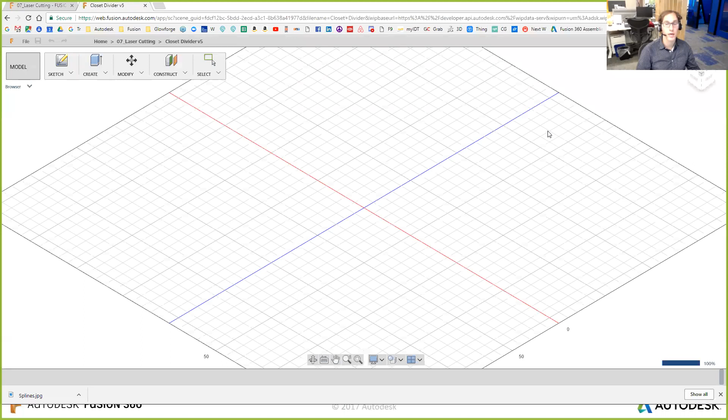Now, we are going to focus today on the desktop client, so I'm going to bring that up. And we are focusing today on sketching. Now, to some people, sketching is not the most interesting of topics. To me, I think it's the fundamental skill that you're going to need if you want to design anything in 3D. Now, I don't care if you're going to be designing in 3D for stacked laser cut products, or you're going to design in 3D for non-laser cut products. Either way, you are definitely going to want to focus your skills in sketching if you want to be successful.

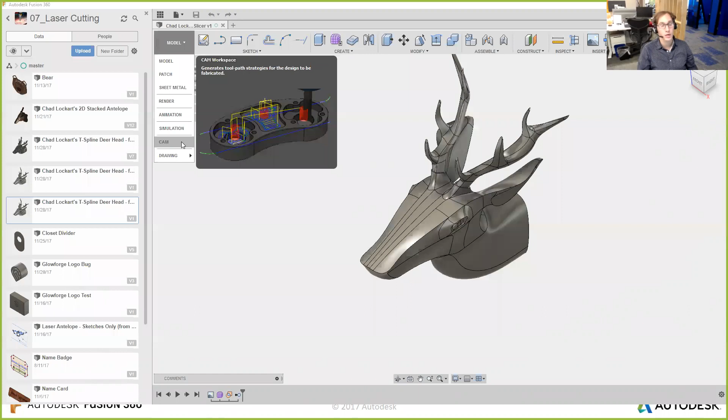The reason is because you can put your kerf offset into the CAM environment, create your design in the final shape you want, and have the kerf automatically adjusted for you. Again, we'll take a look at that in another webinar—today's going to be about sketching. We also have the ability to make drawings, which are 2D drawings for manufacturing.

Now, I did mention that we have the animation environment, and so this is the kind of thing you could do in the animation environment.

Let's say you wanted to start with a front view of your product, and then at 3 seconds in, you want to have an angle like so. And then at 7 seconds, you want a view that looks like this. And then at 13 seconds, you want a really far out zoom like that.

Now I'm going to hit the play button on my computer. I'm not going to touch my mouse whatsoever this whole time. This is just a quick example of the type of animation that you can create here in Fusion in the animation environment.

All right, so I promise you that we're going to talk about sketching today, and I really do want to focus on that. The first thing you should know is that there are multiple ways to get into starting a sketch. The first way is saying, I want to create a sketch, and here's the icon for Create Sketch. I can click on the icon, and the next thing it's going to want to know is where do you want to create the sketch.

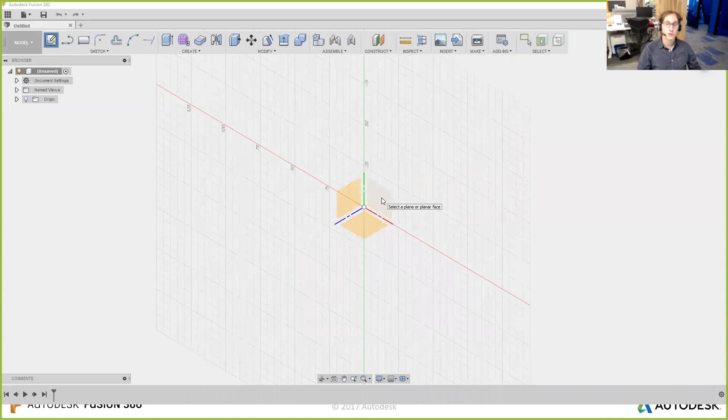Now, you do have to create a sketch on a flat surface. That can be a face of an existing part, or it could be a plane. In this case, I see 3 planes: a right plane, a front plane, and a top plane. I could choose any of these, whatever you prefer is perfectly fine. So let's say I chose the front plane. Now it's going to give me a front view of that particular plane, and I can start my sketch. As an example, I can draw a rectangle or whatever it is I'm going to draw.

I'm going to exit out of this, and we're going to show you another couple of ways you can get into the sketch environment. The next one is I can actually pick the plane first. In this case, I have a folder here that shows me the origin planes. Let me get rid of that rectangle. If I turn on this light bulb under the origin folder, I'm going to be able to see all 3 of those planes that I described, even before I hit that I wanted to create a sketch. I can see the right plane, the top plane, and the front plane.

Hold on a second, I'm seeing from Larry that he's getting input from another mic, which is interfering with the presentation. I apologize, Larry. This is a working Autodesk office, we have over 140 employees, I believe, at this location, and so we do have some noise in the background. Perhaps on the next webinar, I'll, in advance, make sure that I pick a private room for us.

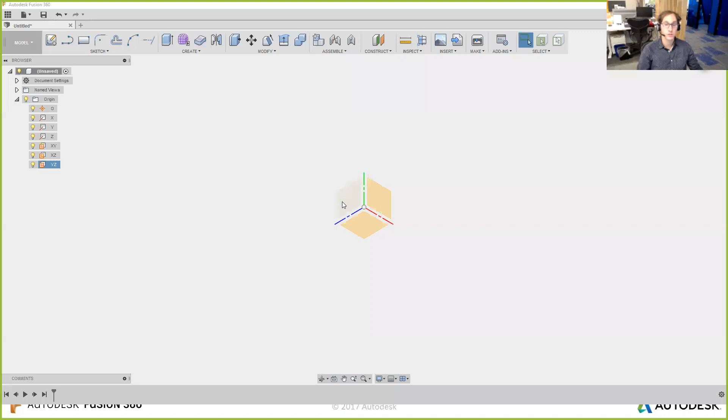So I'm going to just make sure to talk more loudly so that you can hear my voice over everything else. I was saying that you can create your sketch by choosing one of these planes first, right-clicking on that plane and saying Create Sketch. And in that case, again, it's going to reorient me, so I'm looking straight on to that particular view, and I can start my sketch itself.

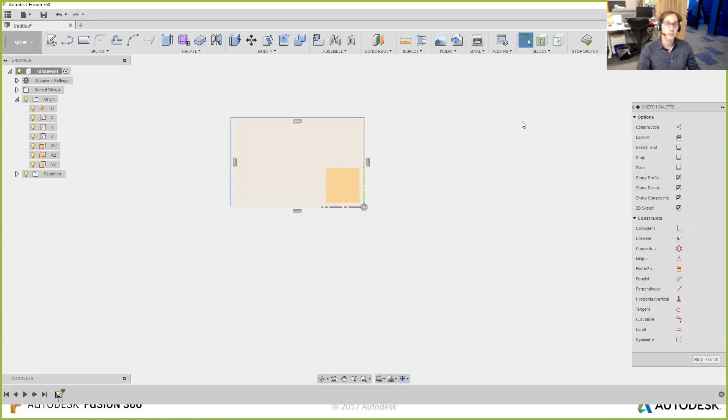Again, just as an example, I can go and choose my rectangle. Now, whenever you want to exit out of the sketch, I was just hitting the Stop Sketch button on the bottom right of my screen. The alternative is I could also hit Stop Sketch on the top right of my screen. Lastly, if I know what I'm going to be using the sketch for, I could actually just start doing that thing. For example, if I wanted to make a box out of this particular rectangle and I'm going to use an extrude, I can simply go to extrude and then actually choose that shape. I don't have to exit out of the sketch first.

Excellent. So those are the 2 ways that I would go into the sketch mode. Once you're in the sketch mode, I want you to know that all of the tools that you might need are going to be in this drop down here on the left, the sketch drop down. The sketch drop down in combination with the items in the sketch palette, that would be everything that you might need to create a successful sketch.

So I have here all of the shapes that I'd want to start with. Let's say I wanted to start with a line, here it is, I can choose line. If I want to start with a rectangle, I can choose rectangle, and within rectangle I have 3 different options for how I want to draw it. Same thing with circle, I have 5 different options. I can do an arc with 3 options, and a polygon with 3 options as well, and this polygon can have any number of faces you'd like. Let's go over each of these one by one.

First is line. I click once, I move my mouse to anywhere I want, and then I click again. When I'm done, I hit enter on my keyboard, or I can drag to this little checkbox and hit it, either works. Conversely, if I'm drawing this and I get to the second point and I hit escape, that also works.

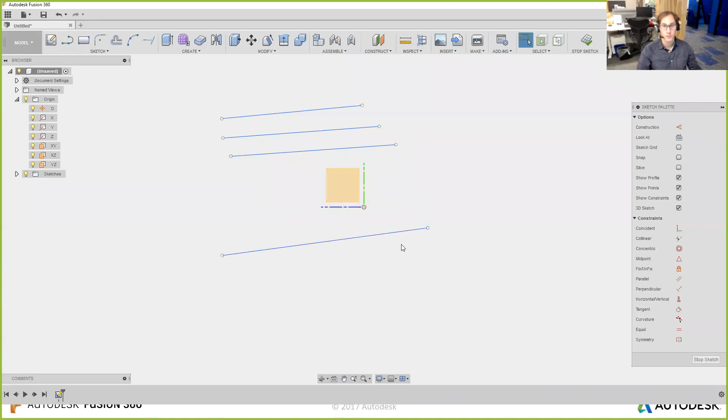The big difference between escape and enter is this: if I draw a line and go to the next place and hit escape, it completely finishes the line and exits out of the line tool. So if you wanted to create another line, you'd again have to go to sketch, line, or hit L on your keyboard, that's the shortcut. Then I could say I want to start at the end point of the first and continue on, but this time, instead of hitting escape, I'm going to hit enter, and same result.

Also, what you could do, though, is if instead of hitting enter, you simply keep choosing new points, that'll actually make basically a polygon or any number of faces that you'd like.

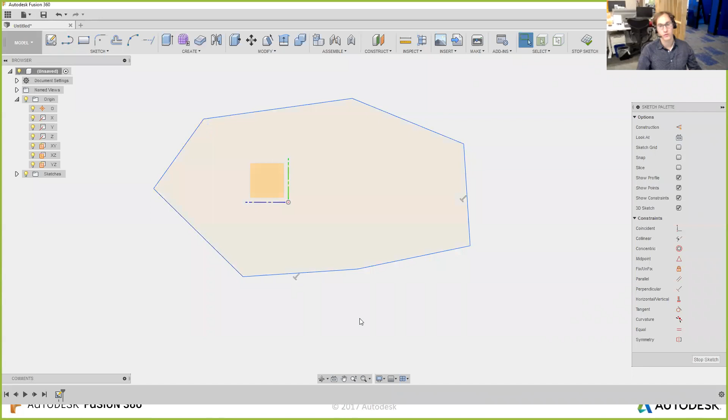Let's do that again. I'm going to delete everything. I'm going to hit the letter L, which is my shortcut for line, and I'm going to click. Every time I click, it's going to make a new segment, and it's going to always be attached to the previous one. You'll see that right here. And when I finally close all of that together, that's when you're going to see it convert into this orange fill in the center of the shape, and that's what you're going to be able to use to make 3D objects.

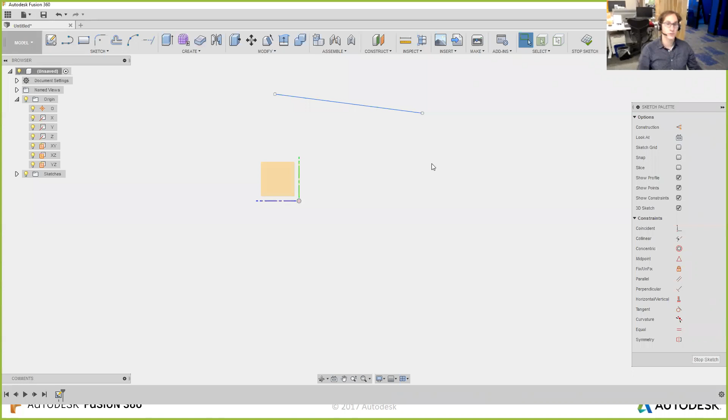So you might be asking yourself, why can you make 3D objects out of this and you couldn't do the same thing when it was just a line by itself? The reason is because the way Fusion interprets objects for being able to turn it into 3D is that it's looking for what we call closed profiles. The closed profile is always going to be a closed loop of some kind, and it could be complicated, it doesn't have to just be a loop like this.

It could also be, for example, a simple rectangle with maybe some more complex geometry to it. And as I'm doing this, you're going to see that it's not going to show me that orange fill until the moment that I connect it to the end, and it is now a completely closed profile.

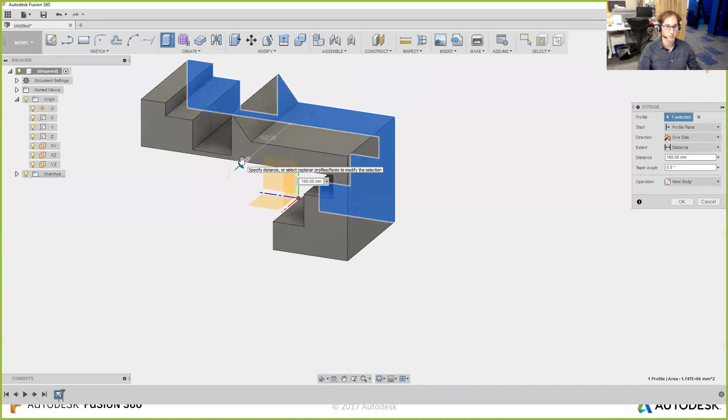This is an object now that I can take and click on. You'll see that the blue fill means that I clicked on it, and the black outline shows the same, and I can turn it into a 3D object of my choosing, like so. I'm going to cancel out of that.

So going back to our line command, the letter L on your keyboard is your shortcut for line. You can click on any point you want, and I want you to see that depending on where you're clicking, you're going to be able to impose what we call constraints to the line automatically.

For example, if I drag the line and it looks like it's approximately horizontal, you can see that there, just in the middle of the line, in the center, there's that blue icon. It looks like 2 horizontal lines and 3 angular ones, that's the symbol we have that represents horizontal. So when I click for the second time here and then hit enter or escape to close out of that line, you're now seeing this icon again, showing you that this line is always going to be horizontal.

If I click on an end of this line and drag it, it'll move, but it's always staying horizontal. If I drag the line itself, again, it'll move, but it's always staying horizontal. In fact, the only way that I'm going to be able to change the angle of this line is to click on this icon, which is the horizontal constraint, and hit delete on my keyboard.

And now that that icon is gone, now I can come in here and actually change the angle of that line. And that's going to be super handy, and we'll go over some more information about that in just a little bit. So I'm going to click on this line and delete it. The next tool here is rectangle. And we have 3 different rectangles. The first one is called a 2-point rectangle.

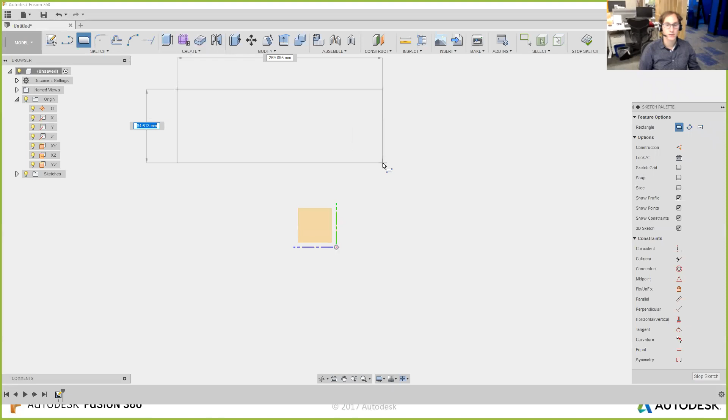And if I click once, and then I move my mouse and click again, it basically drew a rectangle from that corner to the other corner. And it'll do that any time that I'd like. And you can see that it actually shows me dimensions as I'm dragging so that I can have a feel for what the size is going to be of this rectangle.

And if I want, I can even type in a value and then hit enter, and it'll be that value. Not only will it be that value, it would actually show you the dimension. Whereas in the first 2 instances, it didn't show you the dimension at all. You'd have to go and put those manually, like so. All right, let's delete all that and do that again.

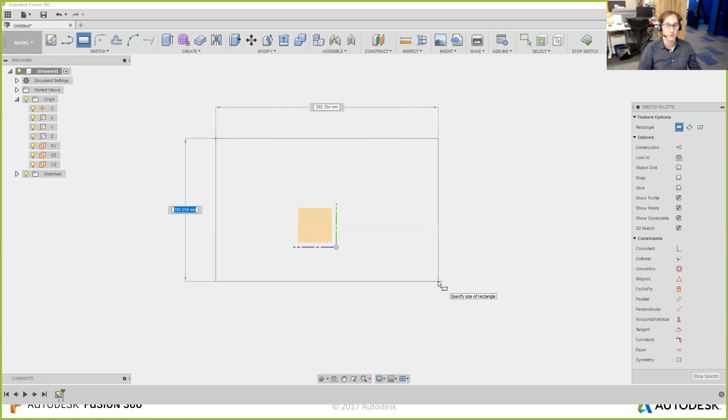All right, we're going to go back and go under rectangle, 2-point rectangle. The keyboard shortcut, right over here, the letter R, is telling me that all I have to do is click the letter R and I get to this tool. I click once. I'm not clicking and holding. I'm just clicking once, and then I move my mouse, click again, and it creates my rectangle.

Now, I do see here that I have a bunch of constraints that were automatically applied. So that horizontal constraint was applied on the top and bottom, and I'm also seeing it on the vertical lines. And you might be wondering, how can you have a horizontal constraint on vertical lines? The reason is because our horizontal constraint is really a horizontal/vertical constraint. It works for either. Perfectly vertical, perfectly horizontal, either or is fine.

And if you ever want to apply that constraint, and I'm going to delete them right now, and when I delete them, you'll see that I can come in here and now manipulate my rectangle, right? Because now it's not requiring any of the sides to be horizontal or vertical at all times. But if I want to apply a constraint, like the horizontal one, I can click on the line, and then on the right-hand side, you can see here it says constraints.

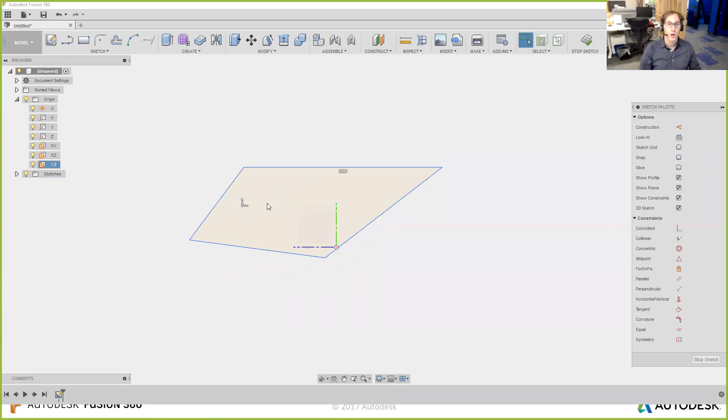And anything below it is going to be a constraint that you can apply to the geometry that's on the screen. So in this case, this one right over here is horizontal/vertical, and it's going to snap to whatever is the closest to the current geometry. So I click it and it goes horizontal. I can click on this line and choose the same thing and it becomes vertical. Same thing over here and it becomes, well, that kind of went into a weird place.

I'm going to undo that, and it's because right now that line happens to be near 45 degrees, and so it wasn't sure what to do with it. But if I drag the line so it's more vertical than horizontal, I can click on that line and choose horizontal/vertical, and now it's vertical. Again, same thing over here, horizontal/vertical, and now I'm back to where I started.

Excellent. I'm going to go ahead and delete this, and we're going to create a different kind of rectangle. This time, the center rectangle. We're going to skip the 3-point for a second. The center rectangle is the same as the 2-point, except when you click the first time, that first click is going to be the center of the rectangle that you draw.

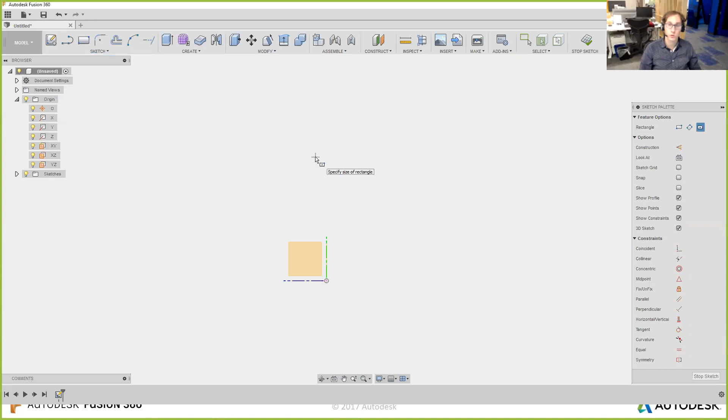So I clicked once, and now I'm dragging out, and it doesn't matter if I drag really wide and not so tall, or really vertical and not so wide. Either way, this is going to create a rectangle that starts in the position that I clicked on in the first place and ends in the second click.

And I could still take this thing and highlight it and move this anywhere I'd like. I can move it around and manipulate it and do all of those kind of things that I'd like. But the only difference is that in certain cases where you know that you wanted to draw a rectangle where the first click is the center, please use the center rectangle tool.

All right, we have a third rectangle. The third rectangle is called the 3-point rectangle. This is a really good rectangle to use when the rectangle you're trying to draw is not perfectly vertical. Let's say you want to draw a rectangle that's on an angle. The 3-point rectangle is for you.

So I click once, I move to another position, I click again. That basically defines what the angle is of the top or the bottom of the rectangle. And then I can drag either way, whatever I prefer, and it's going to set the other dimension. And if I just hit enter, it creates the rectangle. Oh, sorry, I have to click again. Click again, and it creates the rectangle without any problem.

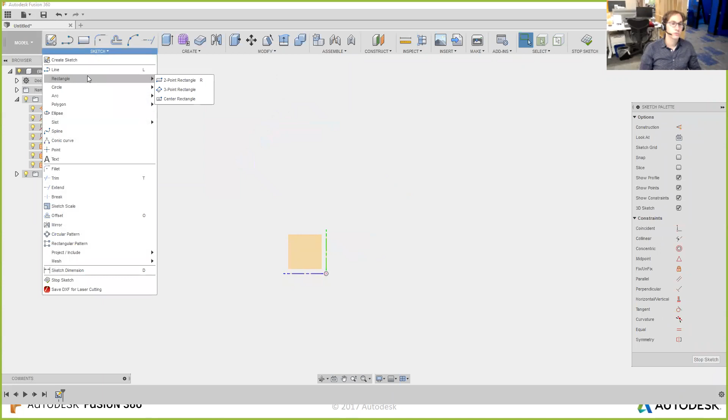Now, I'm going to do that one more time for you guys so you see it again. Try it again. Sketch, rectangle, 3-point. So again, the first time I click, it's going to create one of the corners of the rectangle. The second time I click is going to create another corner. And then the third is going to create the, let's say, height of the rectangle itself.

Now, you could also do this if you really wanted to for horizontal rectangles. You don't have to do this only for angles. So for that situation, a 3-point is I'm going to choose like this. And as I drag to the right, notice that because I'm approximately horizontal, that blue icon for horizontal showed up just below the horizontal line. I click again, and then now I'm creating the height of the rectangle.

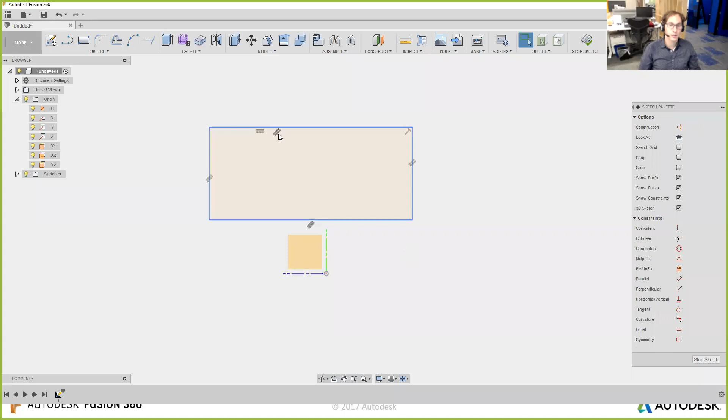So 3 ways to draw a rectangle. There is no right, there is no wrong. There are just 3 rectangles. Now I am seeing a couple of additional constraints that I didn't see before, and so this would be a great time for me to introduce what they are. I'm seeing this symbol, and I see it on the top here, down below, on the left, and on the right. And what that symbol indicates is what's called parallel.

And so right now, there's a constraint saying that no matter what I do with the top line, the bottom line is going to be parallel to it as well. And the same thing is true with the left vertical line and the right vertical line. They are always going to be parallel to each other. So for example, if I were to get rid of the horizontal constraint at the top,

and hold on a second, everyone, I'm going to make sure it's a little quieter here.

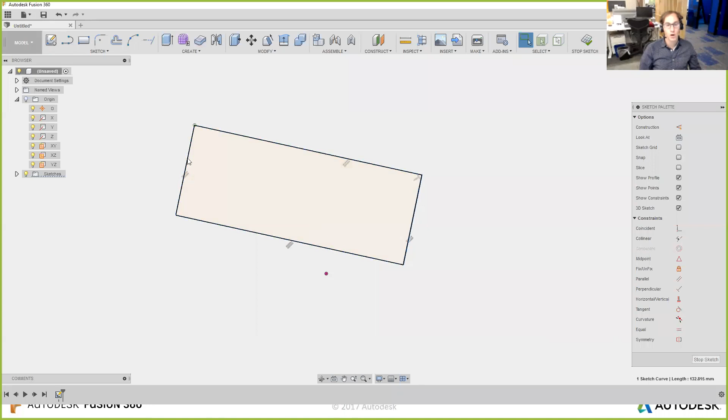Okay, thank you guys. So now that I got rid of the horizontal constraint, I can come in here and, let's see, there we go. I'm going to take this thing and actually start to rotate it. And the key here is that because I have a parallel constraint here and here, these 2 lines are always going to be parallel to each other. I move one and the other is going to move as well, right? Same thing is true with the top and the bottom.

If I ever want to get rid of that, all I have to do is click on the icon and delete it. And notice, by the way, and I'm going to undo that again, notice that when I deleted this one, it deleted that one as well. It's because that constraint applied to both geometries. So you can see the symbol on both sides.

Excellent. So this time I'm going to delete this parallel constraint. And now I can actually come in here and rotate this thing. And you'll see that now this line and this line are no longer parallel to each other. Right? If I ever want them to be parallel again, it's as simple as applying the parallel constraint again.

So I come over here to parallel, click on it, and then I could choose two lines, any two lines that I'd like, and it's automatically going to apply the parallel constraint and show me the icon for each of those as well. Now that that's been applied, any change that I make to one is going to change the angle of the other as well. Okay. Excellent.

Now we do have a third constraint that I see here, and I'm going to zoom in. Actually, zooming in isn't going to make the icon any bigger. The icon itself looks like the letter T, and that icon stands for a 90-degree angle, right? So what that means is 90-degree angle or perpendicular, whichever terminology you prefer to use is perfectly fine. And so right now, this line and this line are 90 degrees to each other. That's kind of why we have that T-shaped icon.

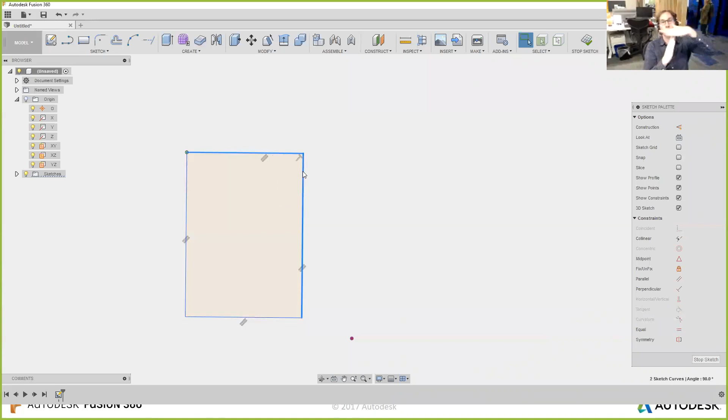And they're going to remain 90 degrees to each other no matter what. So when I drag this corner and this line changes angle, this one's also going to change angle, and it's going to do so that no matter what I do, they're going to remain 90 degrees to each other. If I want to get rid of that one, all I have to do is click on that constraint, hit the delete key on my keyboard, and now I can come in here and I'm going to fix this just so that we have a good example here.

Now I can come in here and bend my rectangle relative to that line. Technically speaking, I believe this is called a rhombus now. And that's what you're seeing on the screen. But if I ever want to put the perpendicular constraint on again, you come over here and I'm going to pick this line and this one. And I'm going to come over and choose perpendicular, and it's automatically going to become perpendicular and show me the icon.

Cool. So we've so far gone over lines and rectangles in detail, as well as horizontal/vertical for a constraint, parallel for a constraint, and perpendicular. But we have a whole lot more to cover. Let's go under Sketch, and this time we're going to go under Circle. So the first one is called Center Diameter Circle.

And what that's going to let me do is choose a first point for the center of my circle, and then when I move my mouse out and click again, that's going to create a circle of a certain size based on how far I moved my mouse. I'm going to do that again even: click once, move my mouse, and it shows me a dimension, and I can even type in a dimension and hit enter. And it's going to create that. Not only is it created to the right size, it's also going to add the dimension. Perfect. I'm going to delete that, and we'll do it a different way.

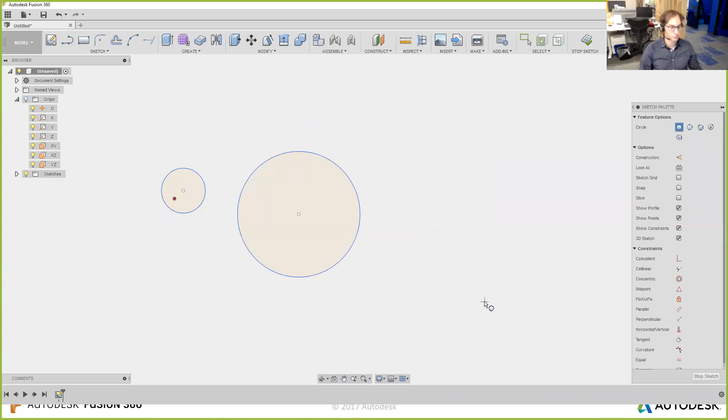Now, you have a bunch of different options. So 3-point circle, for example, lets you pick 3 points. And I did that too fast. Let me do that one more time. Circle, 3-point. I click once, click again, and now I can move my mouse, and as long as those first 2 points and where my mouse is right now are all in the same circle, that would be the resulting circle.

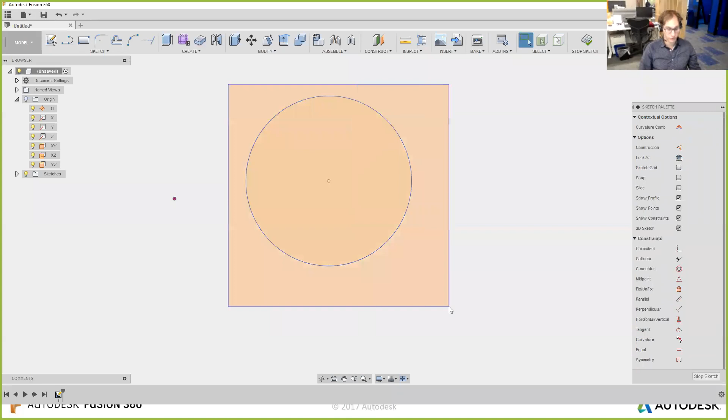Now, the final results are always the same. It's just a circle. It's just a question of what's easiest for you to draw based on what you're actually trying to accomplish. Okay? And we do have other different circles available, but I'm going to leave it like that for now. We also have the ability to draw arcs. And arcs, by the way, are really just portions of circles. And to prove that out, there I have an arc.

Now I'm going to draw a center point circle, and I'm going to drag it so it lines up. And now I have an arc that I can sort of highlight there. And then I have a circle that's on top of it, and you'll see that they're one and the same. In fact, if I delete the circle and leave the arc, I can actually take this point of the arc and drag it all the way around, and when I get it to connect with the other end, it's going to now be a circle, right? An arc is really just a portion of a circle.

Now, I'll admit, I probably use arcs more than circles. I use arcs a lot. We'll go over that in just a bit. I just think that arcs are really handy. The other thing I do is I draw circles sometimes, and then I trim them until they become arcs. Either would work fine.

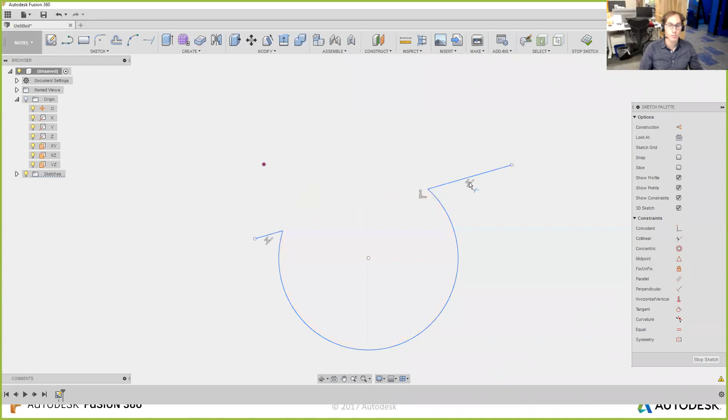In fact, if I draw a line and I cross that circle, I can actually come in here and trim both of these, and so now I'm left with, you guessed it, an arc. Perfect. I'm going to delete that, and we're going to continue on.

Even if you are drawing an arc, by the way, there are 3 ways to draw an arc. The first is the 3-point arc. You pick 1 point, move to another point, pick again, and then when you move your mouse, now it's actually dragging out to create that arc. This is very similar to drawing the 3-point circle.

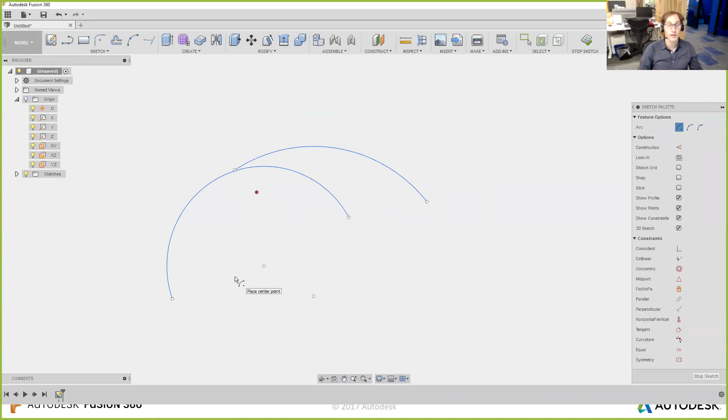Excellent. You can also say, I want to draw a center point arc, where you're picking a point, and then you're picking another point, and the first point is going to represent the center of the arc itself. The second is one of the endpoints, and then you drag around to create the third. Now, I don't want to go over that in too much detail, but I want you to practice trying each of the different ways you can make each of the shapes. Again, the result is the same, it's just a question of how you get there.

And by the way, if you're in any of those tools that have multiple options, like circle, for example, on the right-hand side, even though I chose maybe center point circle, I can switch to one of the other kinds of circles right over here. I don't have to exit out of it and go back to the sketch tool, find circle, and pick another. I can pick any of the circle tools and then choose another from right over here on the right-hand side.

Excellent. We also have the ability to make polygons. So here I'm going to go and create a polygon. And when I drag this out, I have the ability to come over here and choose a number. So maybe I want 10 sides to my polygon. Maybe I want 100 sides to my polygon; the higher the number of faces, the more it's going to look like a circle, by the way. And I could even do something like 13 sides or even 3 sides, and you're going to end up with a triangle. Excellent. There we are. I'm going to delete that and do that again.

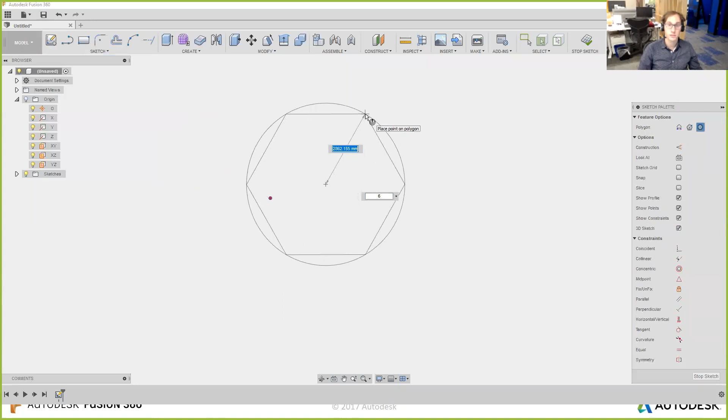I'm going to go under Sketch, Polygon, and I could choose circumscribed polygon or inscribed. Basically, it's telling you whether there's a circle that goes around the outside of the polygon or a circle that goes around the inside of the polygon. Either one is fine. It's whatever your preference. Let's say I'm going to draw a bolt. I would probably want a 6-sided head for the bolt. And so I come over here. It's already set to 6, and I click, and there we are.

Now, this is going to be a little bit of a throwback to constraints that we talked about earlier. You can choose any of the lines here, like let's say this bottom line. And if I want this thing to always be horizontal, what are we going to do? Well, we're going to apply a constraint to it, and that constraint is going to be a horizontal constraint. If you don't like the word constraint, if for whatever reason it doesn't really mesh for you, I want you to think of constraints like rules.

So in this case, I'm going to apply a rule and say, from now on, this line must be horizontal, right? And I'm going to choose that rule, and now that line is always going to be horizontal, or at least until I decide to break that rule or delete that constraint. Hope that makes sense. Excellent. So I can come in here, and I can place this however I like. I'm going to go and delete that, and we're going to go on to something else.

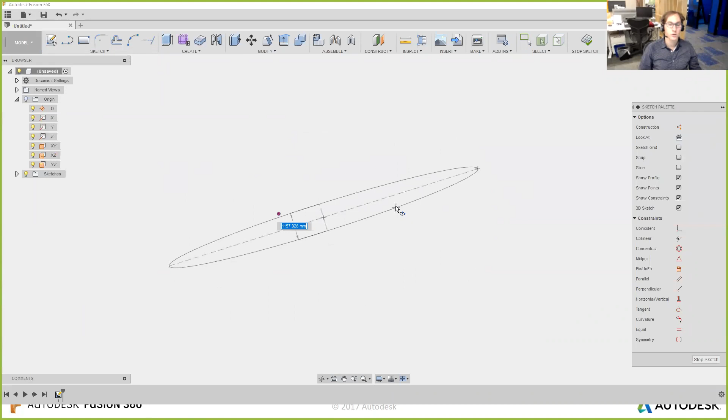I can go under Ellipse, and Ellipse is basically an oval. So I can click once, and what it's doing is it's coming out with this dotted line, and then I'm going to click again, and now when I drag, it's going to show me an oval. And you can see here I could do a really wide and skinny oval, and that oval doesn't have to be perfectly horizontal.

Now it can be if I wanted to. So I'm going to delete this whole thing, and we're going to do it again. Sketch, Ellipse, and this time after I click the first time, I can click approximately horizontal or approximately vertical to the original position, and you can see that blue icon that showed up next to the line and just below my cursor, again saying that it's automatically going to apply a constraint, in this case the vertical constraint. And so now I have a vertical ellipse or a vertical oval, whatever you prefer.

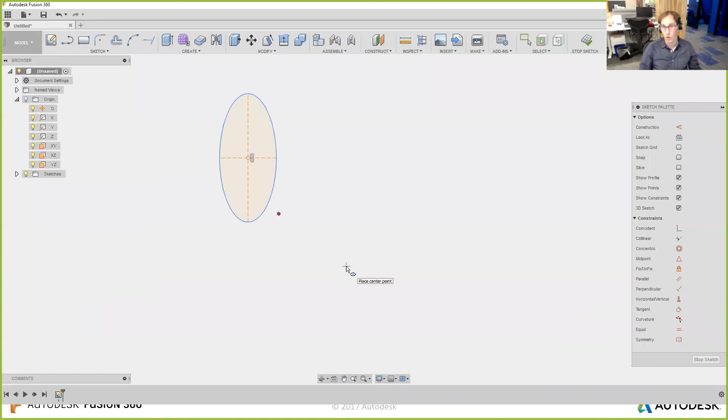Excellent. I'm going to delete that. We could also do, by the way, slots. And slots are going to be exactly what you would expect. I click once, I click again. This time, notice again, I'm drawing a drag rather horizontally, and it's automatically applying a horizontal constraint to this line. I click here, and then now when I drag, it's creating a slot.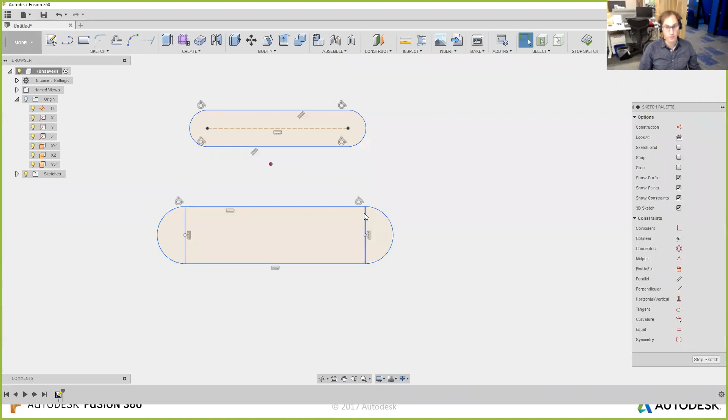And this is awesome because what I used to have to do if I wanted to draw the same slot is I used to draw a rectangle like this. Then I would come in and draw an arc from that corner to that corner, like so, and from this corner to this corner, like so. And then I would say I want the arc and the line to be tangent, and this line and that arc to be tangent, and then I would delete the vertical lines, and now I have my slot. Way easier to just use the slot tool.

I come in again, I choose slot, and we have a bunch of different options on how you could draw it. Click once, drag, click again, drag again, and click a third time, and now I have my slot. Now the only one I want to show you in particular here is the arc slot. You can come in here and say slot, a 3-point arc slot, zoom out, click once, click again, drag. So now I have my arc. This is very similar to the 3-point arc that we had before. This time when I click again, I can now drag and create the width of my slot. And there we have it. Pretty handy. These are all different ways you can make slots.

Excellent. Now we're going to go under Sketch, and we're going to see Spline. Now I'm going to warn you here. Splines are awesome, and they are also difficult to tame. I could do an entire lesson on splines alone because they are challenging. If you want to create complex geometry, splines are definitely the way to go. In fact, if you wanted to 3D model something like this computer mouse, you're not going to really be able to do so with just arcs and straight lines or polygons. It really is going to be a spline that creates that kind of shape. I'll give you a quick demo. I'm not going to do a deep dive because splines alone can be its own lesson.

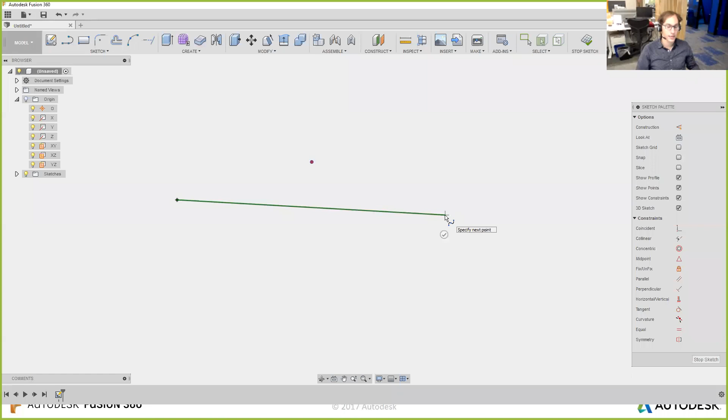When I draw a spline, I click once, I click again, and if I hit enter, it's going to exit out and it's going to look like I have a straight line. And for all intents and purposes, right now I have a straight line. The difference is these green handles that are on the ends, both at the beginning of my spline and on the end. The cool thing here is that I can click on any one of these points on the handles, and I can actually drag this around. And when I drag this around, I can change two things at once. One is the amplitude or the magnitude of the handle, and the second is the direction or the angle of the handle.

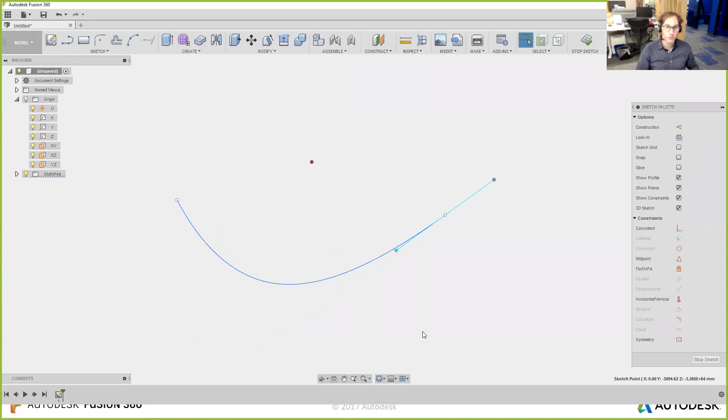You can see here that as I drag in relatively the same angle, the arc starts to change quite a bit. The more that I change the magnitude or amplitude, the more that I'm changing the influence of this handle to the shape of the arc. This is getting a little bit more advanced, and I'm going to try to pull back a little bit, but you can create some pretty incredible geometry with splines. You can also come to the other end and do the same thing with this handle. You could even do it in the opposite direction, and you end up with a pretty curvy shape like this. You can even make multiple control points in the middle.

That's what we call the points in the middle. So if I say sketch spline, I can choose a point like this, a point like this, a point like that, and then another one over here. And when I hit enter, now I have an even more complex shape.

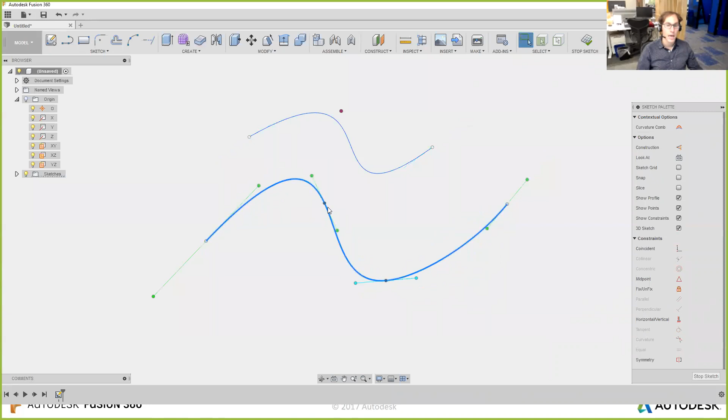Where it gets really crazy is now I can come in here and change any one of these handles, both the amplitude or magnitude of the handle and the direction. What that means is I can get a really crazy shape as a result, but it also means it can be really difficult to control. As you can see, just from messing with it, I've unintentionally created a really weird kink in my spline shape, and that might not be ideal for my product development.

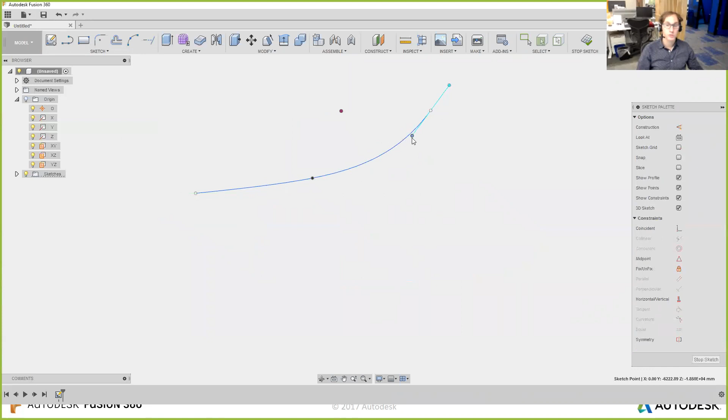So what I'd encourage you to do, and this is all I'm going to say on the matter, is the absolute maximum number of control points that I recommend in your splines would be a beginning point, click once, middle point, click second time, and third point, click the third time. And at most, mess with all three sets of these handles.

There you have it. You can add 100 control points, 500 control points if you want, but the result is going to be pretty complex and really hard to tame to get the results that you want. So this is the most that I'd recommend.

Again, it's a beginning point, middle point somewhere, and then an end point, each one having its own handles that you can drag and manipulate. Remember that you can control the position of the end point, the amplitude of the handle, and the angle of the handle. So that's 3 things I can control right here, 3 things in the middle, and 3 things at the end. That's 9 things in total, and that's plenty. I don't think you should go any more than that.

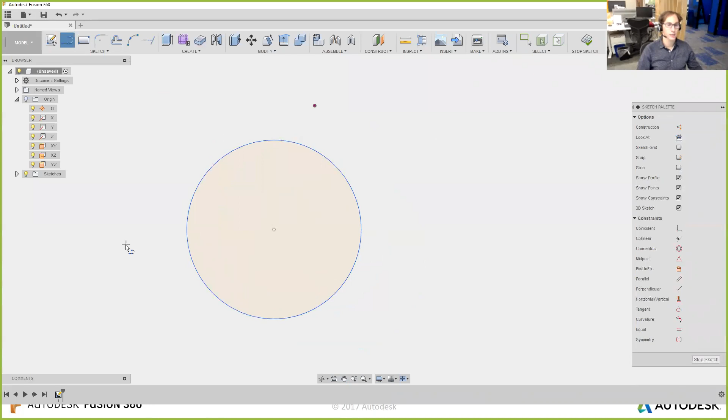What I would realistically do is, for example, if I'm drawing a circle and I want some line that goes across it, and I want this intersection to always be perfectly vertical above the center of the circle, I would say sketch, point, pick the point onto the line, and exit out. Then I could choose the point itself and the circle and say I want them to be coincident with one another. That applied 2 different coincident constraints.

I'm going to undo this so you can see it all again. When I put the point in, I could have put it anywhere. But when I clicked on the line, it by default created a coincident constraint saying that point is always going to be on that line. So watch this—click once on the line. Now, even if this line can't move, I can drag this point and it'll move anywhere on the line I'd like. It's coincident to the line.

Then I applied the second constraint. I clicked on the point, clicked on the circle, and said coincident. Now there's only one solution for coincident to the line and coincident to the circle, and that would be the intersection between the two. So now I could take that point and the center of the circle, and just like before when I made a line horizontal or vertical, I could do the same with 2 different points.

So now I have a point and the center of a circle, which is itself a point. And I could say I want to make that horizontal/vertical, and it snapped into place right away. It applied the rule: from now on, the intersection of the line and the circle shall be vertical from the center of the circle. I can still manipulate the circle itself, and I could even manipulate the line, but it's always going to follow that rule.

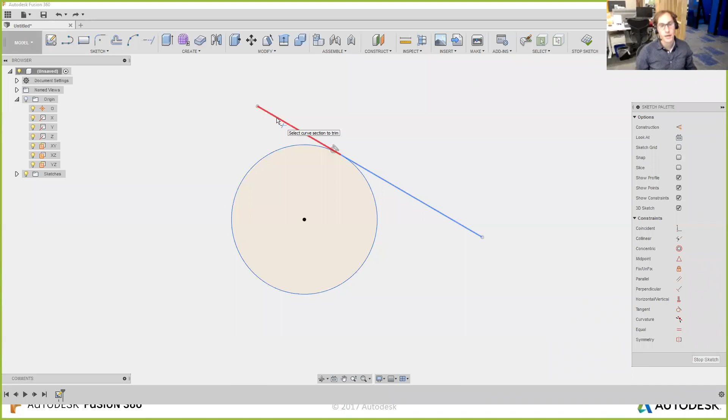Now there is another way I can do that. I'm going to hit undo so the line comes back—that's called trim. So under Sketch, Trim, I can click on a sketch segment, and what it's going to do is look for other sketch segments that intersect with whatever I'm hovering over, and highlight in red what it's going to trim. So in this case, if I click, it's going to trim anything on that line that extends past whatever would intersect with it, which in this case is the circle.

So let's do that more practically. Let's get rid of all this. I'm going to draw a bunch of random lines. There we are. If I wanted to trim this, all I have to do is go to the Trim command—under Sketch, Trim, or I can hit the letter T on my keyboard, that's short for trim—and I can select any of these segments that I want to get rid of and remove them individually.

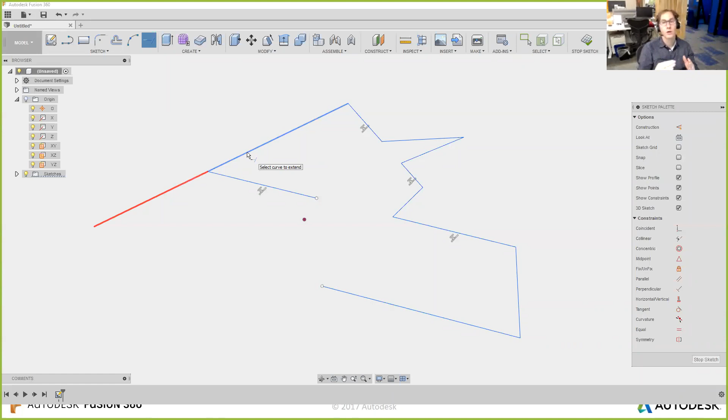Conversely, if I wanted to extend a particular shape, I can do that as well, under Sketch, Extend. When I hover over a line, it's going to preview in red where it thinks it might want to extend to, and depending on what I hover over, it gives a different preview. Right now, for example, you might ask why is it extending to the end of the red? Where did that even come from? I can't show you this easily because if I move my mouse the red goes away, but this bottom line, if you were to extend it out to the far left, it would actually intersect with the end of this red thing. So it's trying to figure out mathematically where would be the next place to extend. So there we go.

And if I did that again, now it honestly has no idea where to go, and it would just go pretty far out. I come over here, and it says it probably wants to attach. You can see it's going to do that for any number of segments. So how is this practical?

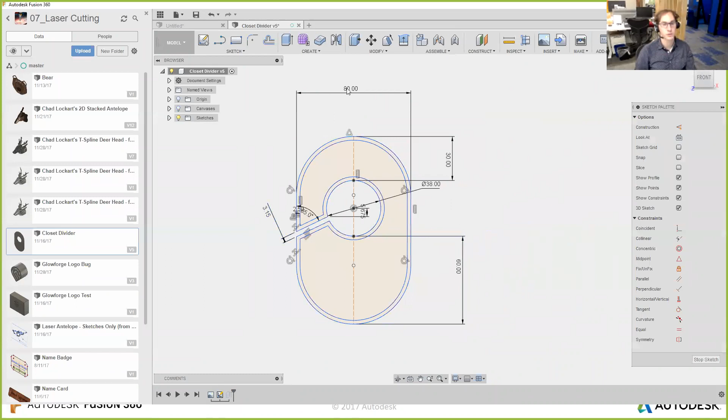Well, let's go into a real part. I have here this closet divider that I think I showed in a previous webinar. Let's go into this sketch. Here I have a sketch with a bunch of dimensions, but we didn't talk much about dimensions, so I'm just going to get rid of half of this. We don't really care about them, we just want to see the geometry. So let's get rid of that profile. There we go. This is the basic shape of my closet divider.

Let's say I wanted to get rid of this notch, I don't want it there anymore. So I'm going to click on this line and hit delete, then click on this line and hit delete. What I can do is go under Sketch, Extend, and when I highlight over there, it extended the circle and actually connected itself. Then I do the same thing over here, and it connected itself. Now I have a closed profile again that I can use for any number of things.

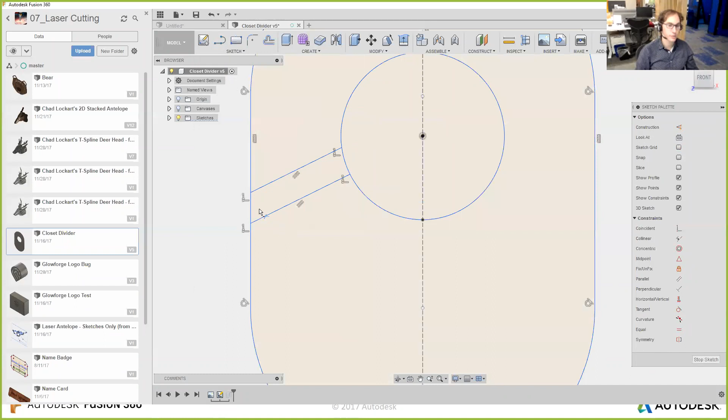Conversely, let's say I started off with this shape, and now I want to put the split in there that wasn't there before. I can draw lines exactly where I want to start. I want to draw a line from exactly here to exactly here, and another line from exactly here to exactly there. Then I could apply constraints and do different kinds of stuff, like a parallel constraint. Then I come in here and trim. I did this a little fast, but I said Sketch, Trim, picked this geometry and that one, and now it's gone. So this is a really great practical example of being able to extend and trim to your heart's content.

Excellent, let's exit out of it. All right, cool. So let's see if there's anything else here that's of serious value.

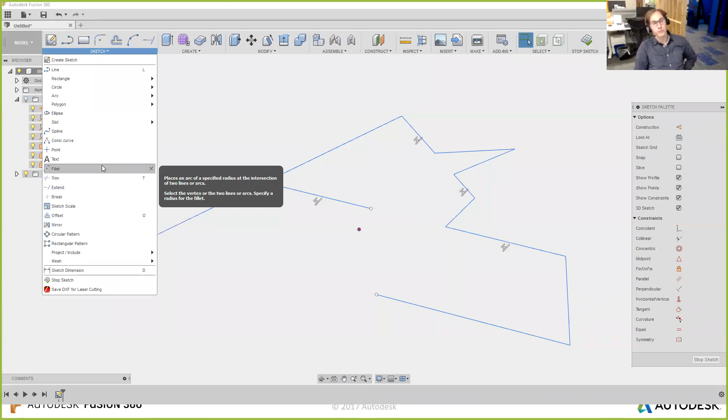Let's say right now I have this line here as a single line, and I wanted to split it up into two separate lines at this point right there. What we do is we call that Break. So I'm going to go under Break. Anytime you hover over any of these tools, it shows you a little tool tip on what it's doing and how it's doing it, so you can have a better idea of what's likely to happen. I'm going to choose Break and hover over this line, and you can see that red X exactly where I wanted it, because it sees that this line over here crosses it at that red X, so that's probably where I'd want to break it. Now that I've done that, I have a separate line for that area and this area.

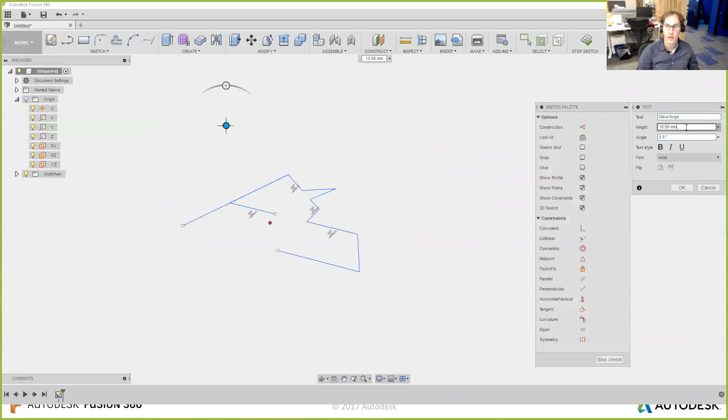So far we've covered almost all the tools over here. We didn't cover text. I don't think the text commands in Fusion are ideal yet, but you do have the ability to draw text pretty easily. So I click on text, and I'm going to type in Glowforge. I can choose the height of the text, how big it's going to be, and then also choose an angle for how I want to put this. In this case, let's make this super big. I'm going to go under maybe 50 millimeters and say OK. And I have no idea where that showed up.

My gut tells me that the scale we're on right now is really small, so let's try that again. Sketch, text. I'm going to pick right over here, and I'm going to type in Glowforge.

And we're going to say OK. And I have a trick for us. If right now I might be too zoomed in or too zoomed out, I really don't know. But I can go down below and say zoom, or I could say fit. And if I say fit, it's automatically going to scale us in or out so you could see everything that you created to the size of your screen.

So for example, this is some text, and let's get rid of the text. We'll bring it back when we're ready. I draw a rectangle that's whatever this size is. Oh, let me try it again. There we are. And I'm going to zoom in really, really far. I can't see the rectangle at this point, and I could be zooming in or out for quite a while until I get to the right size.

I could just say fit and zoom window. Oh, sorry, I did that wrong. We're going to try it again. We want fit, and it's automatically going to scale us out to the right size. That's perfect. Cool. So that's a super handy tip.

Also, by the way, if you're using a mouse with a middle mouse button, and I highly recommend that you do, if it's any kind of 3D modeling, that is definitely the way to go. I don't recommend trackpad, that's for sure. I also don't recommend the little tiny button that you might find in the middle of your keyboard if you're on a laptop. That is not going to be ideal either. A proper 2-button mouse with a third button in the middle is going to be ideal.

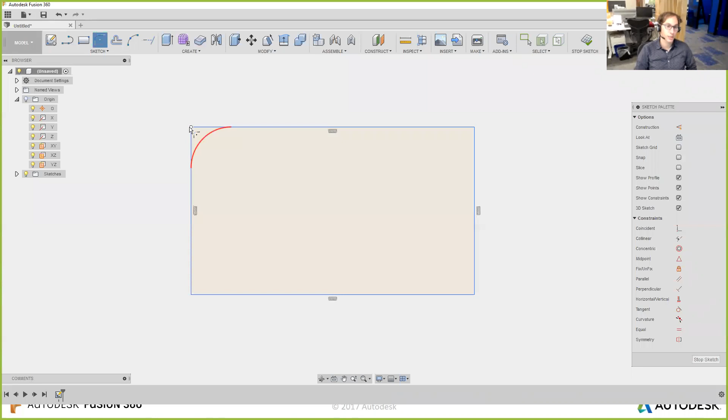So I can come in here and choose a corner, and in red it's going to preview what we're going to get. And then once I click, I can actually come over here, and using this arrow, I can drag it wherever I'd like to preview the size of the fillet. Or I could type in a value like 100 millimeters, and it's going to be exactly that.

I could also do the same thing by hitting the letter F. Oh, sorry. No, that's incorrect. The letter F on your keyboard is a shortcut for a 3D fillet. If you're doing a 2D fillet, like in sketch mode, you do have to come over to the sketch palette and choose fillet. But we do have a third option for it.

If you're using certain tools over and over again and you'd like to have easy access to them, then I'd probably want to take an icon for that thing and put it up in my menu. So right here I have the fillet icon up top. And I'm going to show you how to get rid of it and put it back in. If I click and hold and drag off, it's going to get rid of the icons. And I could do that for all of these icons if I really like.

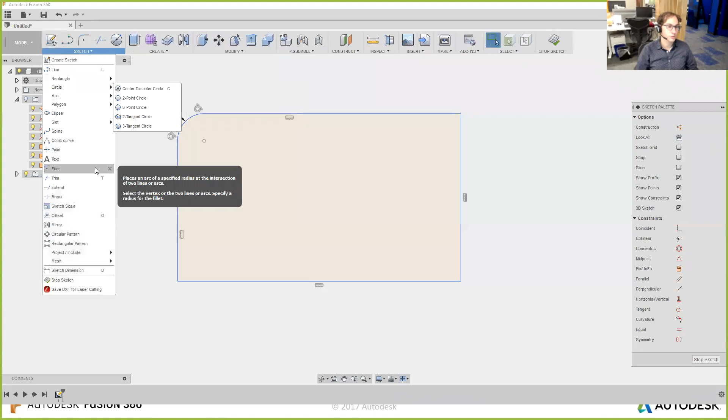And then I can come in here under Sketch and choose anything that I'd like. And when I move to the right end of it, I could choose Add to Toolbar. So I'm going to do that with fillet. I love using it for fillet, for trim. I use a lot of circles, so I'd probably put it for circle as well, and even offset.

If you want to be even more of a pro user, we have keyboard shortcuts for a lot of our commands, but we don't have keyboard shortcuts for everything. So I would probably reserve the space up top for items that do not have keyboard shortcuts. So for example, I put trim up top in this case, and I'd get rid of trim because the letter T would take me to trim immediately. The circle as well, that would be the letter C, so I wouldn't bother with that. But fillet is one that doesn't have a keyboard shortcut, so I definitely have that up top. L I get rid of, offset I get rid of.

I would most likely put in extend; that would be a great one to put there because there's no keyboard shortcut. Anything else, it's whatever you prefer. So let's say I go to fillet, and instead of choosing the corner, I can actually choose the first line and then the second line, and by default it knows what corner you want and is going to do the same thing as before. Again, I can drag this wherever I'd like. And I could also type in a value like 75 and hit enter.

If I draw multiple fillets, so now I have two fillets, this one's 100 and this one's 75. I want to make them both the same. They're always going to be equal to each other. What am I doing? I'm putting a rule. I'm saying from now on, those fillets are going to be equal. So to do that, I'm going to delete this dimension.

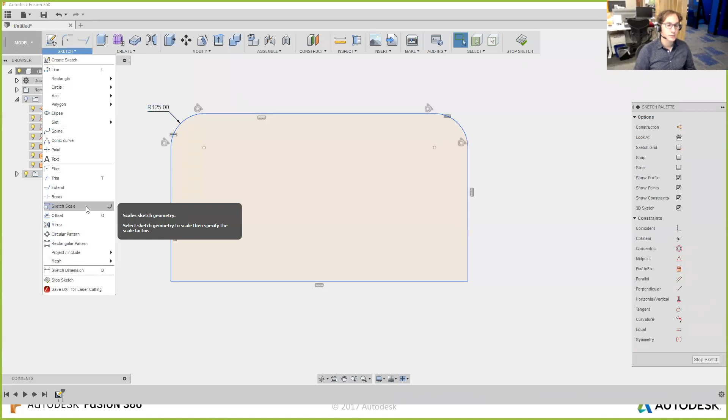Now we went through most of this toolbar. Sketch scale is literally to take the entire sketch and be able to scale it based on a particular point. And so that's super handy. Also though, I would say more handy than that is you have the ability to mirror. So in this case, let's say I draw a line, and you could have a line already, it doesn't have to be one that you draw just for this.

I could highlight this entire shape and say sketch, mirror, and I'm going to choose the mirror line to be this line right here, and it's automatically going to create a mirrored version of the first. But if I modify the first one, it's going to modify the second as well.

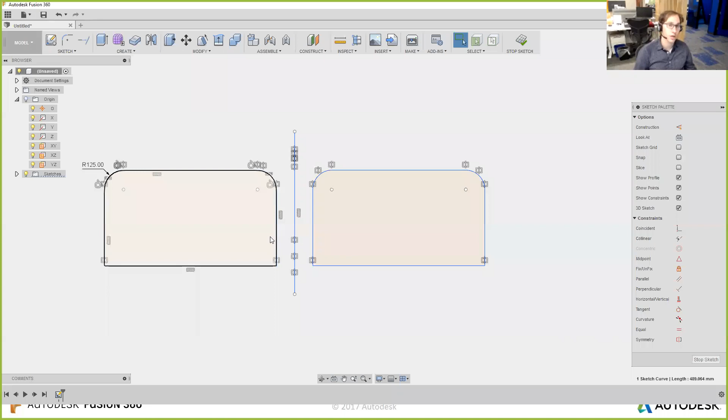This is something that, for a Glowforge user, you can't really do very well in Illustrator. You can definitely mirror across the center line, but once you've done it, it's done. You cannot go and mess with the first component or segment and have it update the second as well. And that's what I think is really great about what we call a parametric CAD environment like Fusion 360. Cool, so that's how mirror works. Let's get rid of all this and keep going.

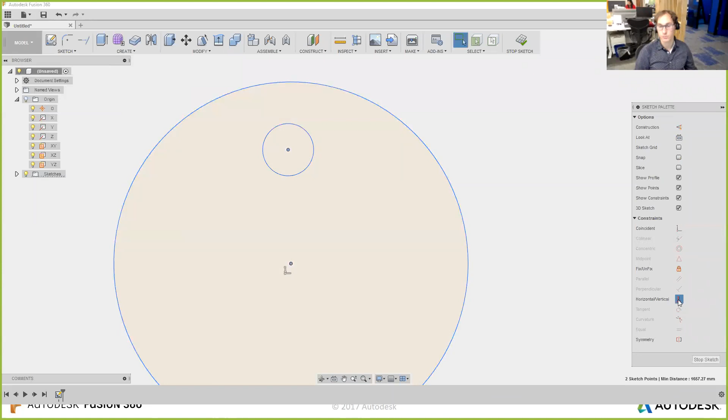We're going to say sketch, and we also have the ability to make a pattern. So for example, on my origin I have a circle, and now I'm going to draw another circle inside it. I'm going to say I want the second circle and the middle to be vertical, right? This thing can only move up and down now. And I want to make a pattern of it. Actually, let's make it more complicated so that it's more visually appealing. We're going to go like this.

We're going to take this line and set it to be coincident. We're going to use the trim tool that we showed earlier. And now I have a hemicircle. And so now I could highlight that and say sketch, circular pattern. And I'm going to be able to pick the center point. That's this center right here. And I could choose however many of these I would like within the circle. And I can actually get that.

That's awesome. So think of, in your case, if maybe you're designing a gear, or a snowflake, or something else that's repeating around a center point, you can draw it once and then have a circular symmetry. Excellent.

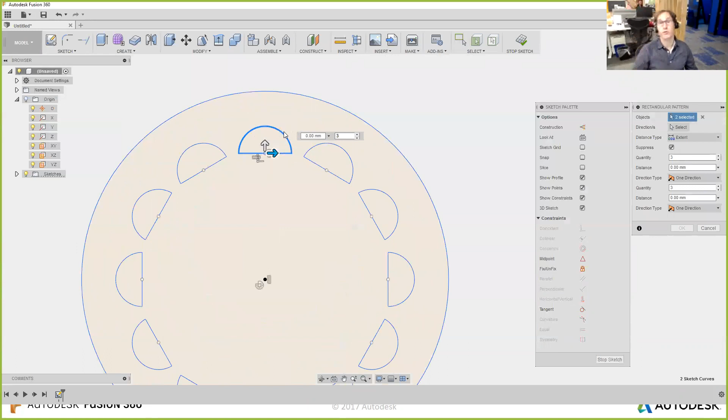Now, I would say that's the majority of the sketch tools in this drop-down. We do also have rectangular patterns, so if you wanted, let's say, this shape to go to the right, however many of those you want, you can come in here and say I want to have 10 of these or 20 of these. So another way to look at that, and let's get out of this thing, we'll do it again.

Let's say for a moment here that you drew some sort of really cool shape, and for now I'm going to use a rectangle, and you want to be able to put lots of these in the Glowforge. You can take this thing and under Sketch, say I want to do a rectangular pattern, and drag this out, and you could have as many as are going to fit in a certain distance. So we could set this as, let's say, 19.5 inches, which is the width of the Glowforge. It looks like my rectangles are way too big for this, so I'm going to pretend like we have more space.

Cool. And I could say that I want to have 3 of these, or 5 of these, or 10 of these in a certain amount of space. Cool. And I can, by the way, do the same thing not only in one direction, I could also do it in another direction as well. And we could say, for example, there we are. Excellent. And so you could actually turn this into, let's say you designed a cupcake pattern, you could make this into an entire cookie sheet. Or, you know, in the laser cutter, however many of these you could fit in your Glowforge.

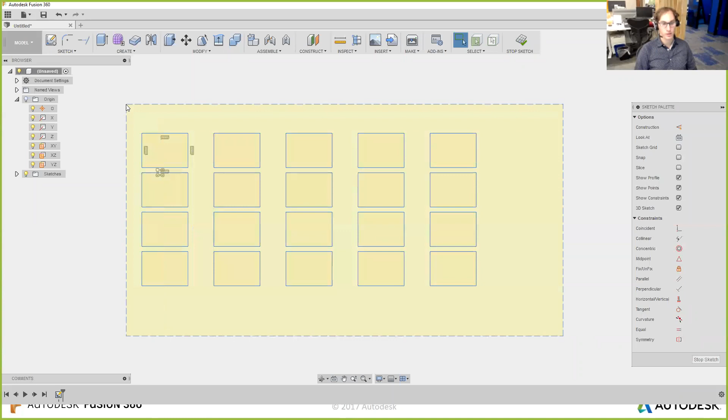Collinear. Let's say I have a line and an arc. Go. And then I draw another arc this way. There we are. Let's say I want these to line up so that this line and this line are straight relative to each other. The fancy word we use for that is collinear. And so I'm going to choose each of these lines. I hold Control in between picking them, and I choose collinear, and they're automatically going to snap to be collinear to each other. Now, the order of which one of those you pick first is going to determine which one is going to move to the other.

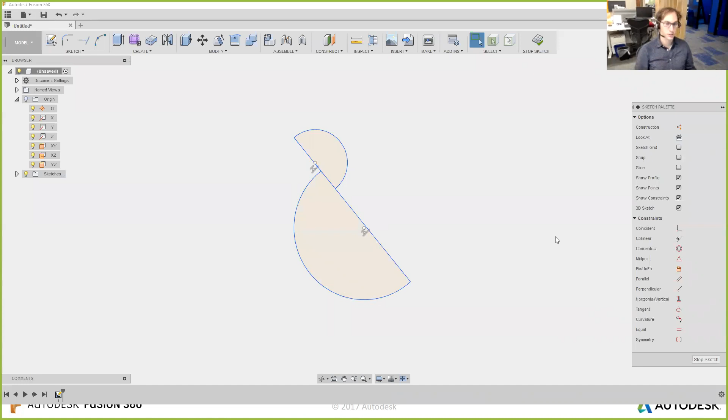And I didn't pay too much attention to what I did there, so let's try it 2 different ways. I'm going to pick this top one first and then this one second and say collinear. And it looks like the second one moved to the first. Let's confirm that that was accurate. This time I'm going to pick this bottom one and I'm going to choose the top second and choose collinear, and exactly what I thought was happening. So the first one you choose is going to be the more static line. The second one you choose is going to move towards the first.

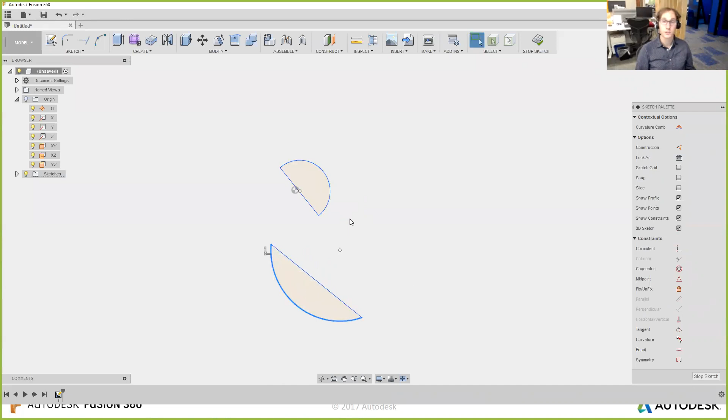Cool. In terms of concentric, so here I have 2 arcs. So let's go back a step. Forward. There we are. I have 2 arcs or 2 hemispheres, and let's say right now these 2, they might be 2 totally different diameters, but right now the center of those 2 circles are in totally different places. I can make them, however, be concentric. That's the term we use for 2 circles that are concentric, one relative to the other. So I pick this one here and pick the second, again holding Control in between. I hit concentric, and it's automatically going to snap to be concentric.

Now, you might not think it did that, right? Because if you look at it, the arc, the second one, the lower one, still looks like it's pretty far away from the first. And I would implore you to recognize that we didn't say that they're equal in diameter. All we said is that the center of each arc is the same, and that is true. The white dot that represents the center of each is now the same white dot. In fact, if I take this arc and I try to make this bigger, hold on, there we go, you're going to see that this circle is about the same distance relative to the outside of the bigger circle. And that's because they are concentric, one relative to the other.

A more concrete example is this. I take this circle, and let's put some dimensions on here. This thing is going to be 50. This one is going to be 25, and they look really tiny in space, but it's okay. I'm going to pick them, and let's see. Whoa, these are like really tiny.

Let's delete this whole thing and start again. We're going to zoom in quite a bit. There we go. We're going to pick a circle. This one's going to be 5 millimeters. We're going to draw another circle. This one's going to be, I'll call it 10 millimeters.

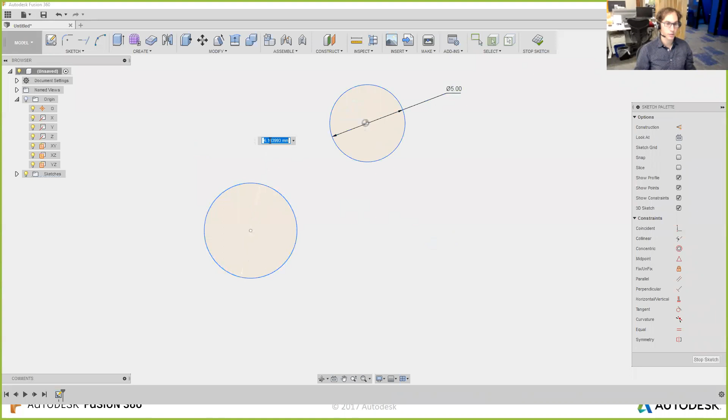And now I'm going to pick this circle and this one and say concentric, and they snap to each other, so that they will always be concentric. Now they move together relative to each other. I could still change the dimension, but they will always be with the same center. And the same is true whether it's going to be an arc or a circle. Excellent. We also said that we were going to go over, hold on here.

Julie was asking, when a spline gets saved, does it come up as segments? You probably asked this quite a while ago, so I apologize I didn't get to it earlier. A spline is always going to be saved and be a spline. It does not come up as segments. That being said, we do have an option in our settings to be able to save arcs as what we call polys, and let's take a look at that real quick.

If you go under Preferences, I believe under Design, hold on just a moment, we have to find it. No. Where was it? I'm not seeing that right now, but it is in here in the options.

Where it'll actually segment things out, because some laser cutters and other CNC machines can't interpret splines very well, and so you do have the ability to export as kind of more segmented if you'd like, but the default is definitely going to be a spline stays as a spline. And if you brought that into Illustrator or anything else, it would come in exactly how you'd expect.

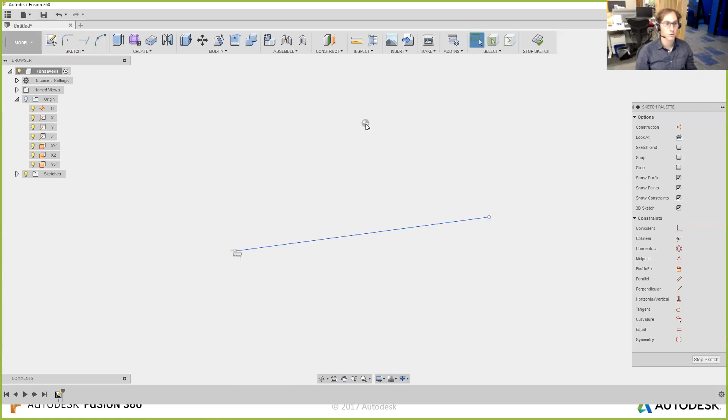Excellent. All right, so we went over coincident, collinear, concentric, midpoint. So let's say for a second I have a line, and this is the origin of my part. I can come in here and say I want to put a midpoint constraint on this dot and this line, and it automatically makes it so that the midpoint of this line is going to be locked into the origin in this case. And that's super handy because that means that you, by default, have symmetry in this particular case.

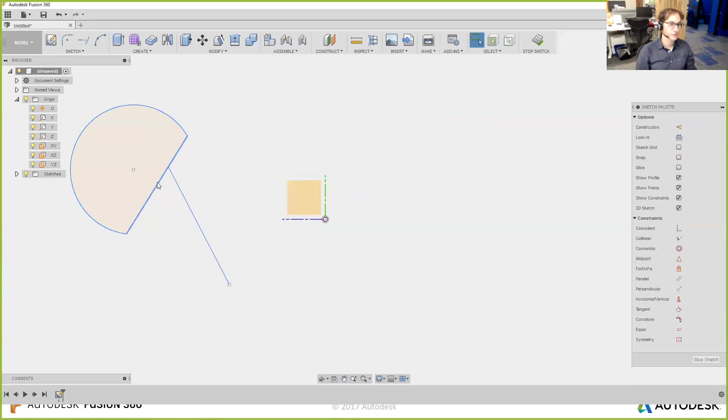Let's give you a more realistic example. So I draw a circle. I have a line coming right through it, and then I trim this up, let's say. And now I want to draw another line, and I want this one to go to the center over there. I can come in here and say midpoint, this point, and this line, and it's automatically now in the center, right?

And now it did tweak the geometry a little bit, and that's because I didn't apply enough other constraints to lock down the shape or positioning of that particular sketch, which is why I was able to move this. Cool. What else did we not cover?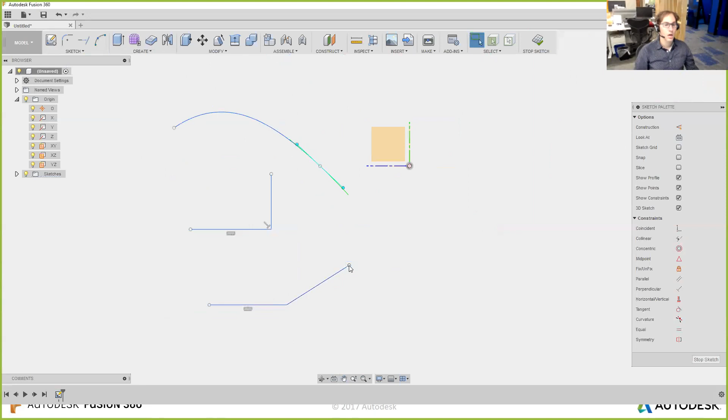Horizontal, vertical, tangent, curvature. Okay, so when we showed splines earlier, we were talking about how splines are super curvy, right? I showed a spline like this, and we can make it nice and curvy. There are ratings for how curvy things are. And so if I draw this corner, I think we could all acknowledge that that's a pretty sharp corner, right? If I draw something like this, even though it's not as drastic, this is still a really sharp corner, believe it or not.

If I were to look at how light bounces off of that corner, it would bounce off in a way that makes it very clear that that's a sharp corner. If I take this original one and I add a fillet, most people would agree that that's now a rounded corner. But people in the product design industry would say that that's not really curvature continuous. And curvature continuous is a very high level of requirement on how smooth something is.

And so let's actually take this and turn it into a real thing, and I think that'll make more sense. So I'm going to come in here and make a rectangle, and I'm going to turn that into a box. Perfect. So now I have a box, and I'm going to turn on what we call zebra stripes. And you guys probably don't use this yet. This is kind of an advanced tool.

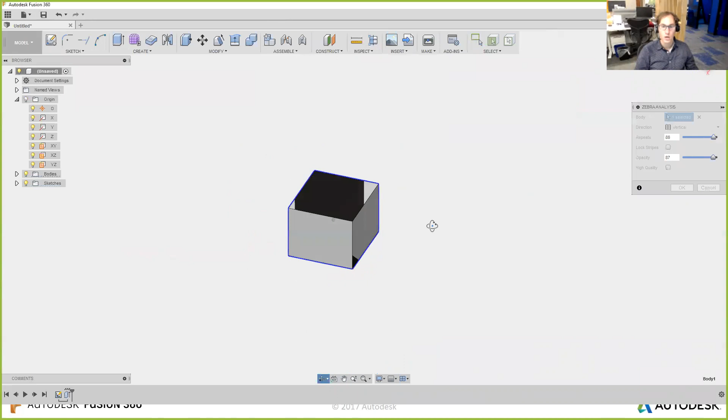And what this is intending to show is how light bounces off of different faces of an object. And if I actually make a sphere, I think that you're going to see this a little bit more clearly as well. So let's make a sphere also. Perfect. And we're going to put the zebra stripes on the sphere.

Perfect. So you can see here that the lines that are on the sphere are nice and uniform. The lines that are coming off of the different faces of this rectangle or box are coming out way crazier, and it's because the light is bouncing off of the top face very differently from the front or the side, whereas the sphere is a perfect sphere, so the results are very different.

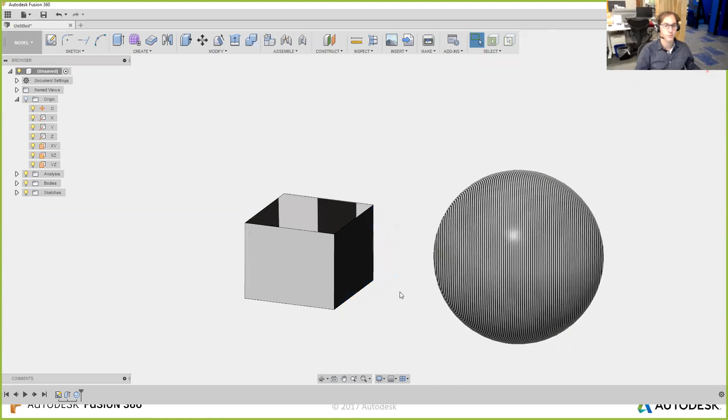If I then come in here and apply a fillet, sorry, it's under Modify, Fillet, and I apply the fillet to these edges here, what you're going to see is that the light actually bounces off of this fillet differently than it does on the front face and differently on the top face.

And that's because even though to you or I this would be a pretty smooth object, for all intents and purposes this is a smooth object, especially if I turn off these lines that you normally see here. Where is that thing? Visual style, shaded. There we go. If I turn that off, this is probably what the object would look like in real life, but you can still see that there's a little bit of a shading difference between the flat and the fillet.

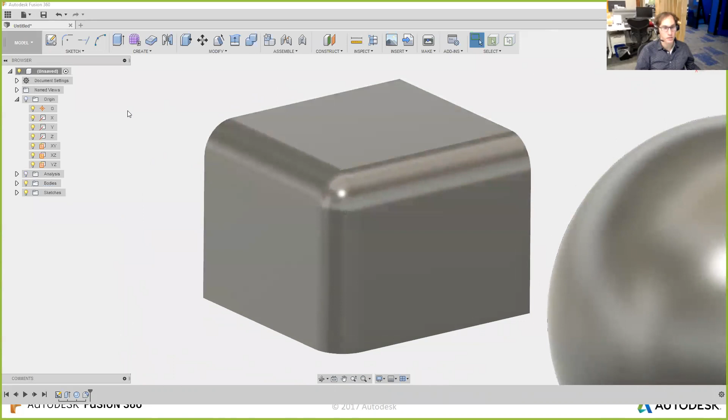And if you're trying to get into really high-end product design and development, then those edges are that much more important, and you want a really nice smooth surface. And so what we do is what we call curvature continuity. Curvature continuous surfaces have a much higher level of smoothness, and splines are definitely one way to do that. And if you look at how we draw the splines, that's how we can control how the light pools or doesn't pool in different areas of the surface.

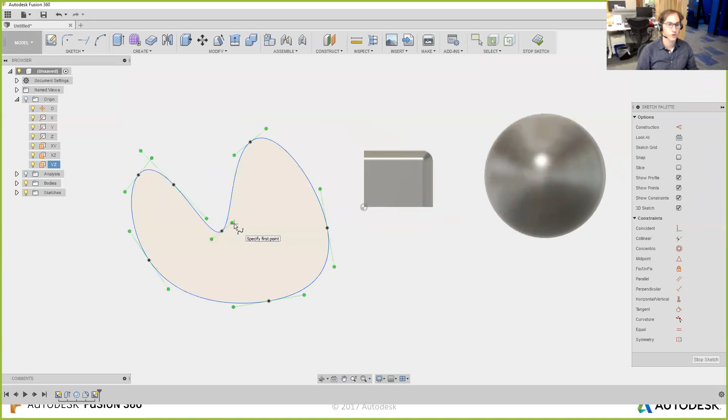And so let's go and create a shape using splines, and then it'll make a lot more sense. And then I'm going to bring this all back so it actually makes sense. Okay, so we're going to come into the YZ plane and we're going to create a sketch. And I'm going to create something with a spline. Perfect. Drag it like that, maybe something like this. Cool. And then I'm going to turn that into a 3D shape.

Perfect. And now, as you go around the surface of this particular part, you're always keeping curvature continuity. And so now if I come in here and apply the zebra stripes, put on the originals, I'll put on another one, on this face right here you can see how the zebra stripes actually flow around the part. And it's definitely an abrupt change from this face to the rest of the part.

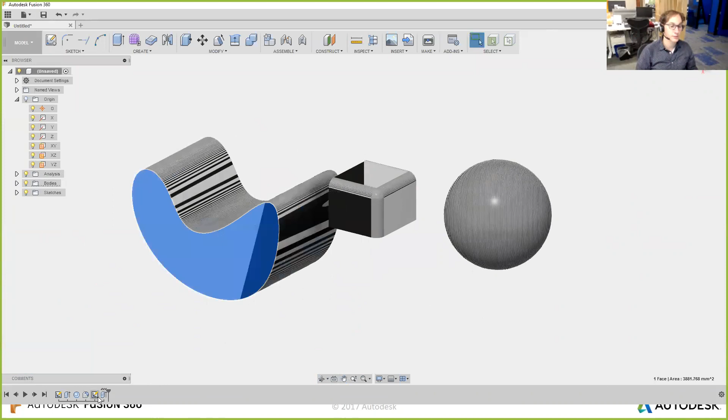Within the part itself, you're still getting changes, right? The surface is definitely changing as it's going around, but you're not going to get nearly as abrupt of a change as you get from this one to that one. It's much smoother. Actually no, I'm going to change directions entirely. So let's go back and create another sketch. I want you to see what the curvature tool actually does.

So if I take this line and this arc, I can apply tangent, and the result is going to be a fillet, just like you saw over here. You can see that's the icon for fillet right there. I'm going to go ahead and draw another arc. Perfect. I'm going to draw another line, and this time I'm going to apply curvature. And in this case, it doesn't even let me, because no matter what you're doing, you can't go from a standard arc to a line and make it curvature continuous.

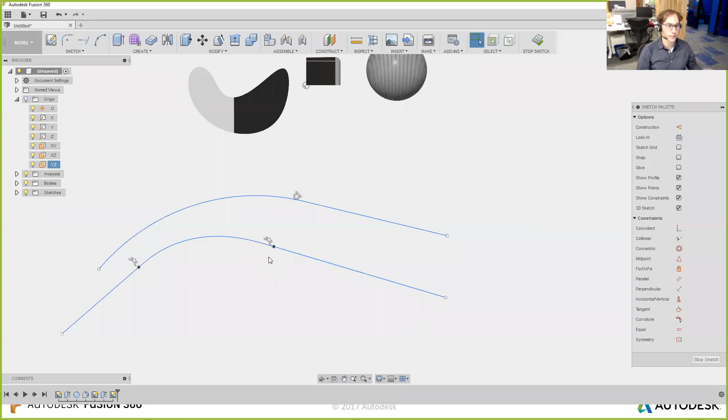So in that particular case, what I'm going to do is draw another line, and I'm going to draw a spline. And this is why I had to talk about splines a lot: the spline is going to allow me to go curvature between these different lines. Perfect. And that symbol looks a little crazy. It kind of looks like a person all laid out.

This is going to be very different than the one next to it, which for most people would look very similar. To really show you the differences, I'm going to make these lines all parallel to each other. We'll say the distance here is 25 millimeters, and the distance here is going to be the same, 25 millimeters.

You can see here that this spline is a little bit different than this arc. The shape is a little bit different. And I could still manipulate it and get a weird result, or a better result, or a worse result. But either way, the spline and this line are now curvature continuous relative to each other, which is a higher level of smoothness.

Now if that was confusing to you, I'm not surprised. If I think about what I just said, it's confusing to me too. This is pretty complex stuff, and I'm trying my best to dumb it down so that anyone who watches this live or as a recording can at least gain some insight into what it means.

The gist of it is curvature is even more smooth than tangent. But for the most part, nearly everyone in the world who's not a professional product designer, product developer, or product engineer would say that tangents are perfectly fine. That would be the way to go. Doing it this other method is a lot more work, and the bang for your buck is not necessarily worth it. So it's up to you on what you guys want to do.

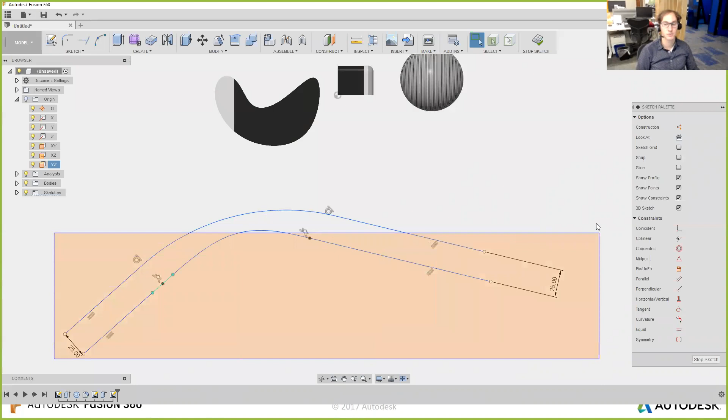Just like before, I showed you creating a rectangle or something like a rectangle. I had a shape like this, and then I drew a line, dragged this whole thing, and said sketch, mirror, and mirrored it across this line.

Cool, and then I ended up with a mirrored version. Now there are plenty of times where you already have two things, and you just want to make it so that they're symmetrical. So instead of making new geometry, you can instead apply this symmetry constraint. So here's a great example.

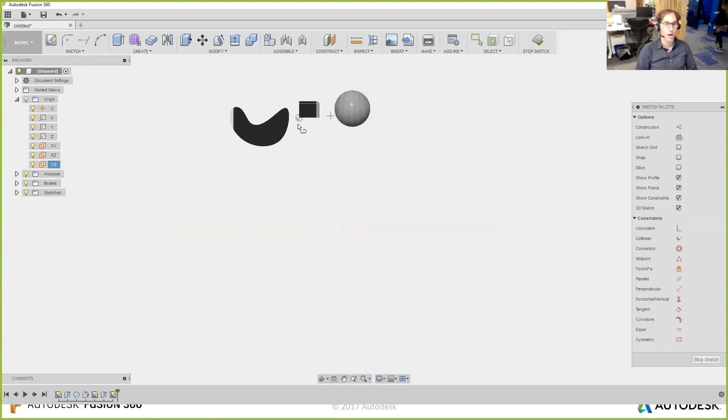Let's delete all that. We're going to draw a line, and this is going to be our symmetry line. Whenever I'm doing stuff like symmetry lines, I like to make it into what's called construction geometry, meaning it's a line you're just using to construct other things. You take a line and click on construct at the top of the options, or click on the line and hit the letter X, and it'll convert from solid line to dotted or dotted to solid, whatever you prefer. Dotted is construction, and solid is something you're actually using to build.

So here I have my construction line, and I'm going to draw a circle over here and another circle over here. Let's say I'm going to draw some sort of bracket, and I want this circle and this one to always be symmetric. I want them to be horizontal to each other, and an even distance from the center. I also want this rectangular thing to be the same.

So I'm going to click on symmetry, and now I can choose line number 1, line number 2, and then the symmetry line. It automatically snaps it so that it's symmetric. Now when I drag this one, it's going to drag the other one as well. With lines, it's pretty obvious that worked well.

Let's do the same thing with a circle. So I pick this first circle, second circle, and symmetry line. And I did not do that correctly. Hold on, what am I doing wrong here? Let's try this again. I'm going to pick the first circle, not the middle, the second circle, not the middle, and I'm going to pick the center line, and it automatically snaps.

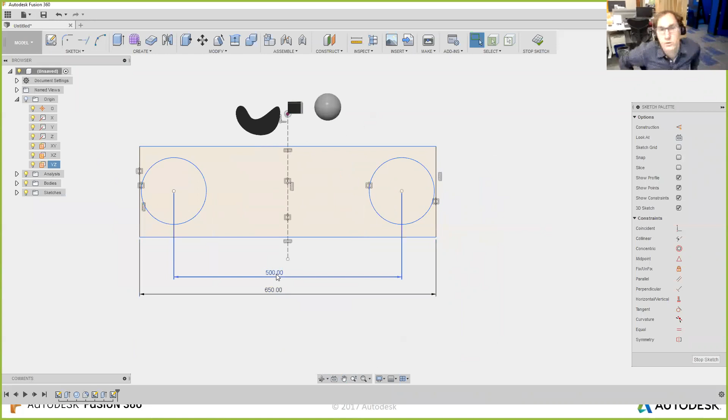So right now I have this dimension for the width, and if I come in here and change the width, like the distance between the circles to 500, I'm going to get some weird result. Right now the circles are way too close to the wall of this rectangle.

So I could dimension things differently, and to do that I want to use different sketch geometry. What I'm going to do is delete this dimension here, create a sketch point, and pick this point here on that circle, which should be all I need. Now I'm going to dimension from this line to that point.

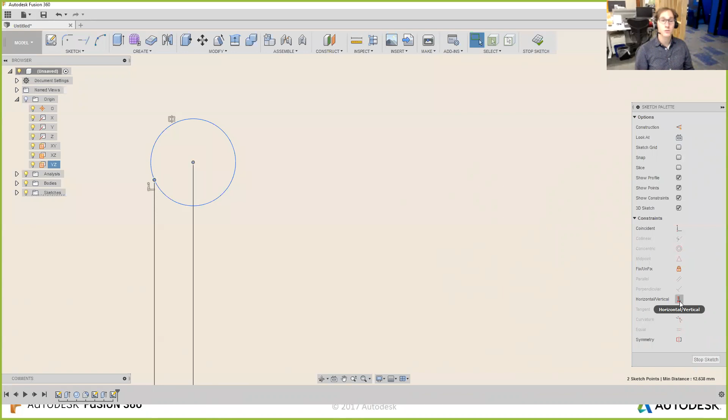I click on this point, click on the center of my circle, and say I want them to be horizontal, and now it'll remain horizontal. I could also apply a dimension to the circle, maybe make that 50 millimeters, and everything starts to take shape. I can come in here and make it 100, even 125, or whatever I want to do.

Do it one last time - sketch a point, take that point in the center, make it vertical. Now I can go and put a dimension from that point to the end, maybe make that 50 as well.

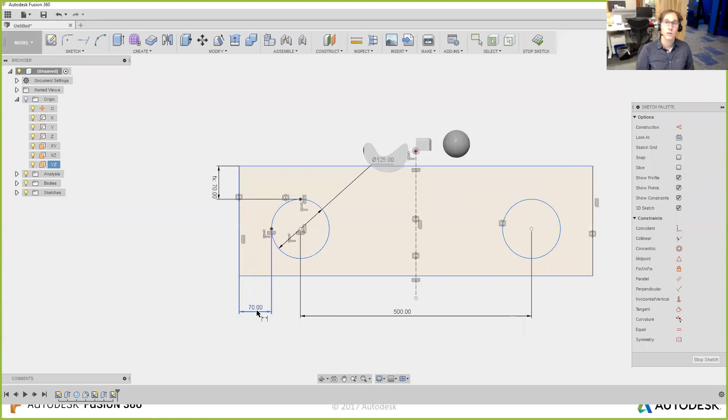I'm going to give you a last tip of the day before we head off - you could also apply equations to any of your dimensions. So if I click on this 50, instead of typing in a number, I'm going to click on this other dimension, which happens to be named D29. The software knows that automatically. When I hit enter, you can see now it says fx, which stands for function, and the result is 50. That's because when I change this one, it's going to automatically change the other, because the other is now set to always copy the value of D29.

Excellent, so we covered a whole lot on sketching, and that was it. We didn't go into creating 3D models or how to create things for the laser cutter itself - all we covered was sketching. The reason I really wanted to cover sketching is because it's the fundamental skill you need if you want to create amazing products in Fusion 360.

Whether those products are 2D or 3D doesn't matter - it all starts as a 2D sketch. So getting your sketching skills up, that's the way to go, and I want to make sure you spend the time to do that. We went over today each of the sketch tools pretty much one by one, which is really slow and painful, but I hope you gain a huge benefit from it.

And then we went through every single constraint that is out there, what they mean and how to apply them. We also showed how to delete them and how to apply them practically - instead of just showing you one constraint here and one there, we showed you how to do it for a practical example. I hope you gain a lot from that and actually go out there and use it.

I hope that if you already have your Glowforge, you love it, and if you don't have it, I hope you get it soon. I know I'm very lucky, and I finally received my Glowforge on the 22nd of November, so I've had it for a few weeks now and I absolutely love it. I also love Fusion 360, and I'm fortunate that I get to use Fusion to work on laser cutting and combine two things that I love together.